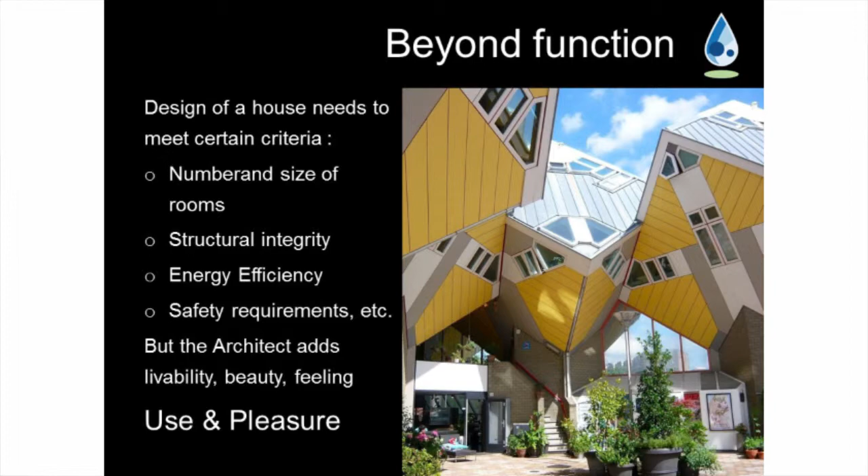But just to step aside a little bit from SuDS for a moment, to a design commodity we all know very well: houses. Houses need to meet certain numerical criteria, things like the number and sizes of rooms, structural integrity, certain energy efficiency standards. But if we designed houses just to these standards alone, we'd probably have very boring houses. And we all know we don't design houses to those criteria alone.

People like architects and designers add something else to those functional requirements, something a bit less tangible: livability, beauty, feeling. They design in the use and the pleasure of living in houses, sometimes to unusual results.

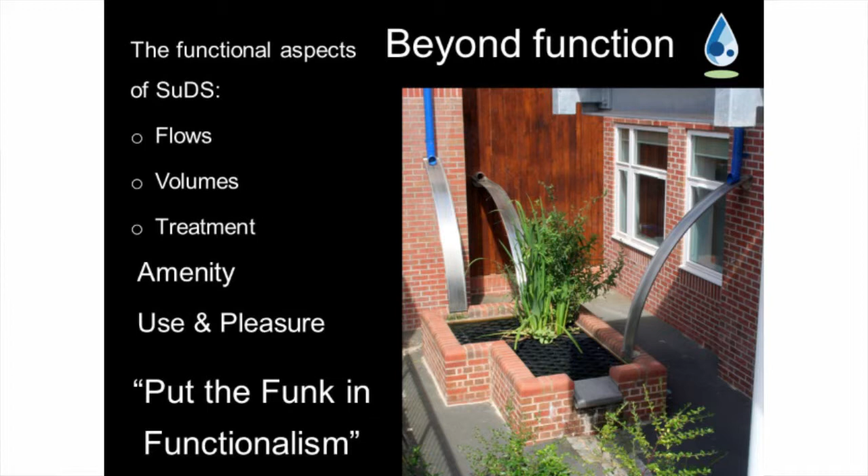Similarly, SuDS has its functional aspects, very important, as Anthony pointed out. We've got flows, volumes, and as in Theo's presentation, treatment, where clean water also supports biodiversity. These are things that SuDS systems need to achieve, numerical criteria we need to meet. But if we designed SuDS purely to those criteria, they would be very boring spaces.

So what we're particularly interested in is, beyond those functional aspects, how do we bring in the use and pleasure into SuDS design, what we call amenity as landscape architects. It's a term that's bandied around quite a lot. I like to think at Robert Bray Associates we put the funk back in functionalism.

In this example, not satisfied with just plain old rainwater pipes, we looked to do something a bit more interesting. We had rain coming out of the rainwater pipes across slides, which the children in this particular school, who have various disabilities and learning difficulties, are able to have a sensory experience every time it rains. It's quite a popular feature when it rains.

At the same time, we're creating something that, even when it's not raining, visually suggests a movement of water. It looks interesting and it looks stimulating.

So what is amenity? Well, a dictionary definition: desirable and useful feature, building or place, pleasant, attractive. These are all words which are quite hard to quantify. We can't really put numbers to those to tell whether we've achieved it or not, in the same way that we can for flows and volumes. These are much more subjective.

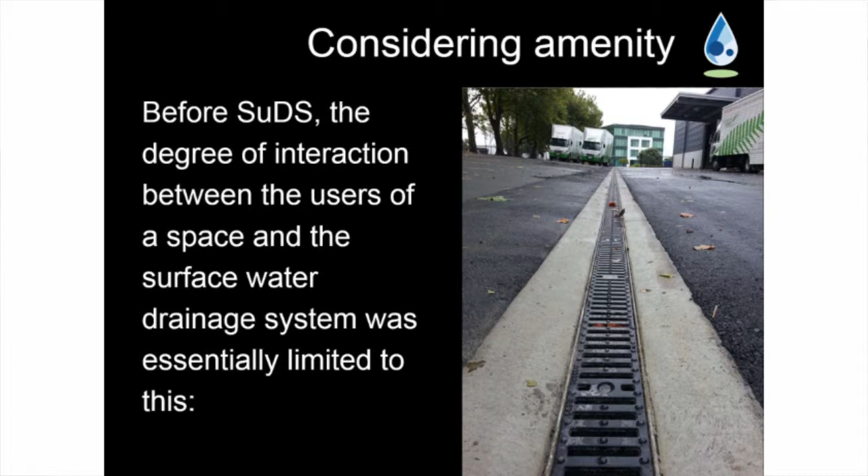Before SuDS came along, people weren't really connected to the surface water system. By the time it went into a pipe, it's forgotten about. After that, most people don't know what happens to that water, which is, I think, why something like Theo's image

of the fish held by a boom on the River Lee - people don't know that happens. That wasn't an industrial accident. It wasn't a chemical spill into the river. That was just a summer storm washing pollutants off roads and killing thousands of fish. Because it goes into a pipe, we've lost that connection of where our pollutants go and the damage it does to our natural environment.

So before SuDS came along, this really was our connection with the surface water system - things like gullies, channel drains, rainwater pipes, slot drains - almost trying to hide away the drainage function to a minimal entity in the environment, almost embarrassed of its existence. Sometimes quite ugly manhole covers, and sometimes, again, we try and hide those covers away.

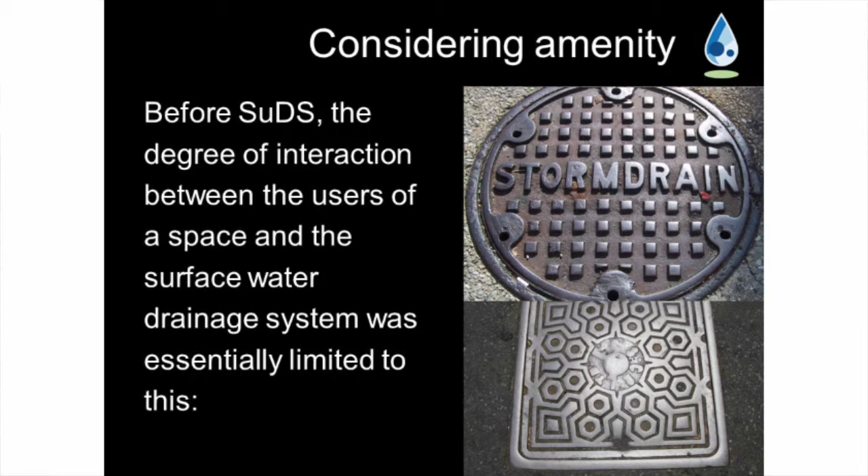In the past, we used to ornament our manhole covers, or even start to tell people what its function was, start telling them that there was a storm drain down there. We don't know how deep or where it goes, but it's a start.

But the SuDS landscape brings - presuming we design at or near the surface, which is perceived as best practice, and we would support that - SuDS bringing water to the surface can only influence that landscape. It can only change people's experience of that landscape. It will have an impact on that landscape.

Here's an example of a low-flow channel we designed at Hopwood Motorway Services. It's probably some 15 years on. It looks like a natural stream now. So we've used SuDS to create actually quite a beautiful environment that looks very natural.

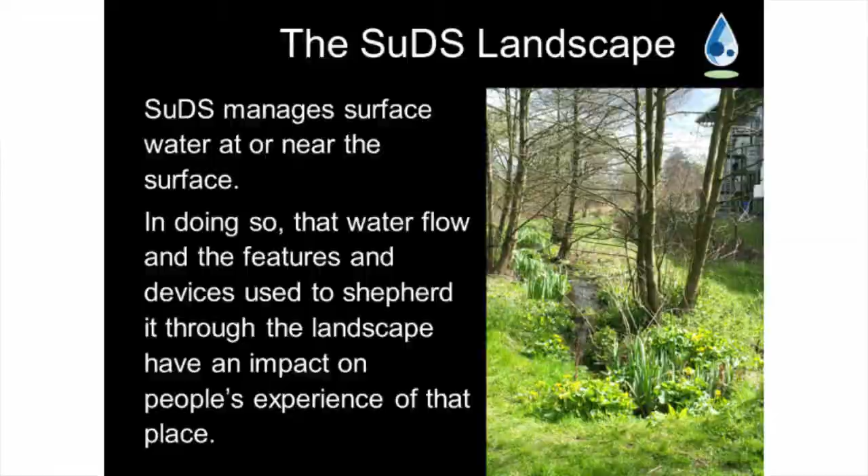So SuDS impacts on its host landscape in terms of how it looks. As we walk through that landscape, we will hear new sounds. It might feel different underfoot. We will have a different topography as we move through. There may be more texture in planting, and there will be potentially sounds of wildlife.

But it also brings a new meaning to that landscape. Suddenly we've got a kind of functional aspect threading its way through the site, which creates a form of connectivity. There's a connective thread as the water moves through the landscape, but it also can interact with the accessibility of the space, and it will affect the usability of the space that the SuDS system runs through.

If it's not designed properly, all these aspects will be negative. The SuDS will influence the landscape in a negative way.

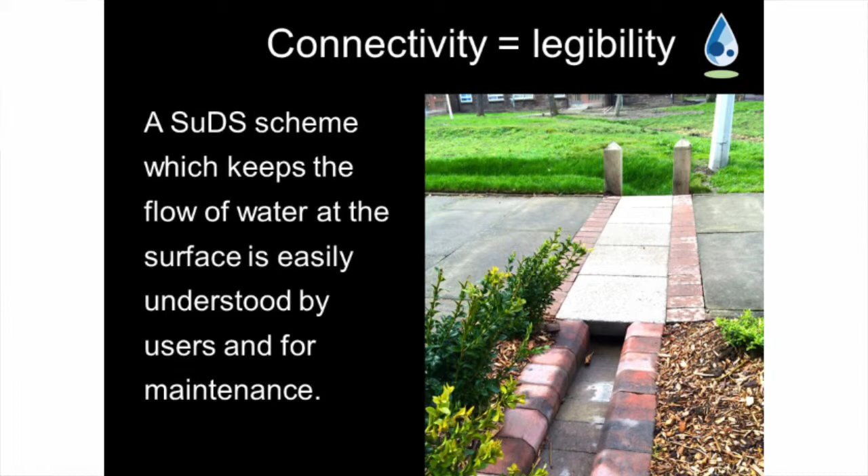Connectivity of a SuDS scheme. If we keep the flow of water at or very near the surface, we can read the way water moves through. Even when there's no water going through, we can see, as this picture demonstrates, there's the rain gardens.

Near Cyprus Docklands Light Railway Station, we developed 4 rain gardens, and the conveyance is all on the surface, apart from where we pass under paths, just for convenience sake, so people don't get wet feet every time it rains. We just drop just underneath the path surface and out again on the other side into that little grass channel. But all the time we can follow where the water goes.

It's really clear how water moves through this site. Even when it's not there, it's suggesting the movement of water, and what that means is it's easily understood by the community that surrounds this space. Hopefully they'll go out when it rains to see it actually working, to see that water move through these channels underneath their path and fill up the rain garden basins.

But also critically, it's easy to maintain. If anything blocks there, it's really obvious what's happened, and it's really easy to unblock. There's a good demonstration there that as we cross underneath that path, we've dropped those slabs slightly lower than the surrounding path. So even if the aperture underneath the path did block, the water will carry on over the top of the path to its desired location.

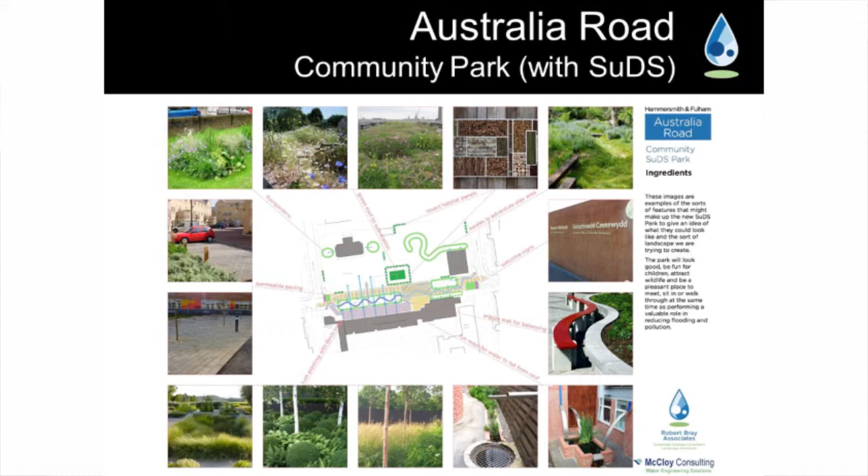So this is a scheme we're working on with McCloy Consulting for Hammersmith and Fulham at the moment - Australia Road. For us, it's a very exciting project. Really, it started out life as a SuDS project, pedestrianising a street in White City, but for the community, the important thing is what it gives back to them. So we're calling this a community park, or a community SuDS park.

Our focus on design is very rigorous, and Anthony's doing a lot of work pinpointing how it should perform hydraulically to support the existing combined sewer that it will flow into. At the same time, it's been very rigorous with our flows and volumes. A lot of work is going into basically a public realm design, creating a park for the community.

So we're looking at how people interact with this space, how they interact with the SuDS features, what happens when it rains. On one side of the site is a school, on the other side are two playgrounds. So it was very clear that this was really a space primarily about children and families, and it lent itself strongly to being a community space.

So we created these SuDS basins, which has a wiggly wall for children to walk through. And on the right-hand side, you can see we've got aerial channels coming from the school and dropping down into that SuDS basin in interesting ways. Ideally, we like to think that when it rains, people will actually go out and look at our SuDS landscapes to see them work, because hopefully interesting things happen and it's quite exciting.

Here's a detail of the sort of wiggly wall that children will be able to walk through the basin, weaving in between trees.

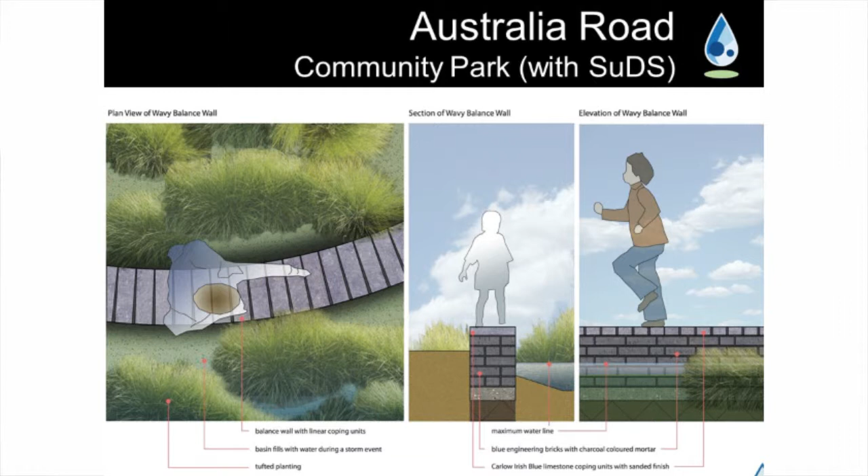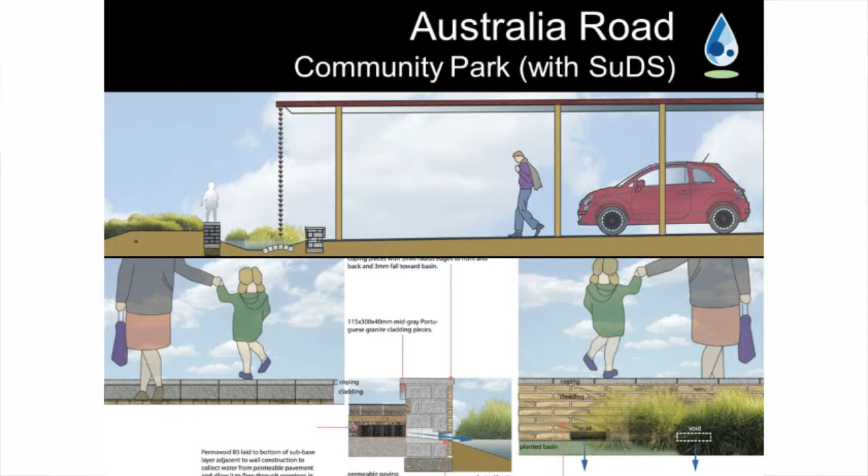On top there is a quick montage of the overhead channel showing how it might drop down a rain chain into that basin. And below, some of the details, we're looking at the raised wall around that basin, so people don't just walk straight into it. But how do we get water from the subbase of the permeable pavement adjacent through that nice granite and stone wall into our planted basin on the other side?

So it's really a combination of SuDS design and high quality public realm design, and really meshing those two together.

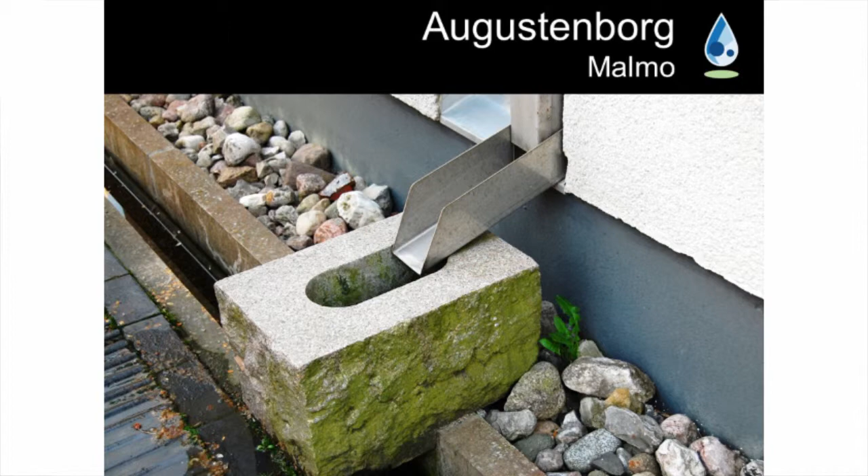Again, a little detail in Malmo, really celebrating the junctions, the flow of water from one feature to another, being creative and playful with the water.

So that kind of sums up really what I wanted to get across today. Thank you.

Have you experienced any sort of real killjoys, particularly where the exposed water would be dangerous for children or adults? Killjoys, as in people who are resistant to our approach to safety around water. Mostly about safety, yeah, very often. I mean, most of our school projects start that way.